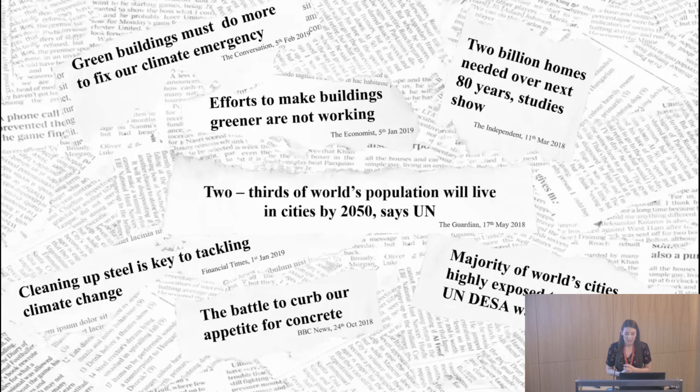The UN has predicted that by 2050, 68% of the world's population are going to live in our cities. And with this comes significant challenges for the global construction industry. We're going to be required to meet the growing demand for urban housing while employing sustainable measures to ensure there is no further advancement of climate change, and to help reduce our progressively increasing risk of urban communities to natural disasters. So what is the solution to some of these challenges?

Well, the solution actually appears quite easy. We just need to build more houses with low embodied carbon using sustainable materials on low-risk sites. But the real issue is what material allows us to do this. And traditional construction materials such as steel, reinforced concrete, brick, aren't necessarily always appropriate for use to solve these problems.

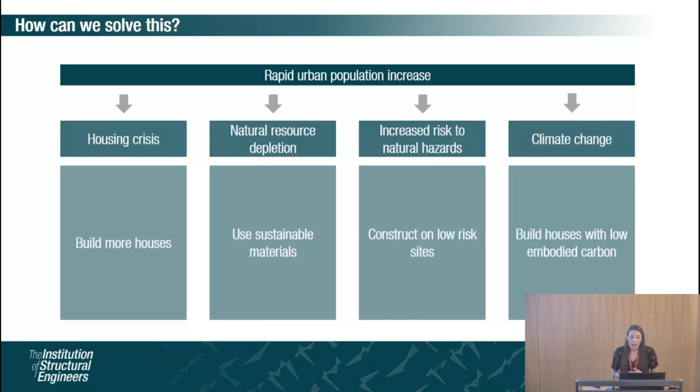For example, traditional construction materials tend to involve labour-intensive construction, which leads to long construction schedules, meaning that it's difficult to build housing quickly and cheaply. The production of these materials involves the use of non-renewable resources, further depleting our natural resources.

To construct on low-risk sites tends to be expensive, and therefore we need a high rate of return to construct economically viable residential buildings. And traditional materials, with their long construction schedules and high labour requirements, tend to be fairly expensive and therefore not always necessarily appropriate for economically viable projects on high-cost sites.

And finally, the production, transportation and construction methods associated with traditional materials, as we know, tends to emit high levels of greenhouse gases, which is further contributing to climate change and resulting in buildings with high embodied carbon.

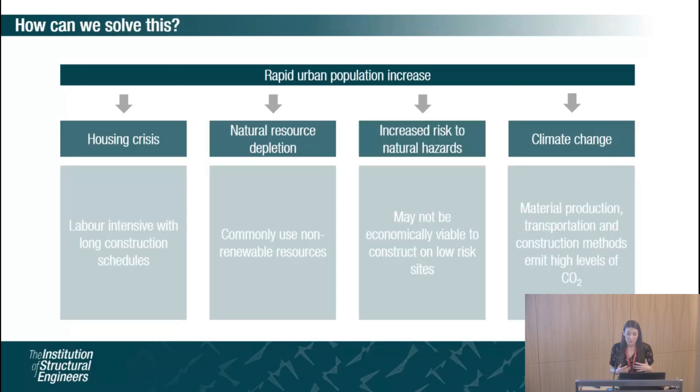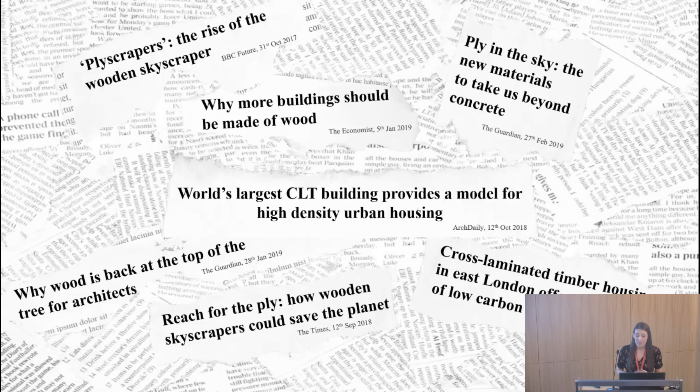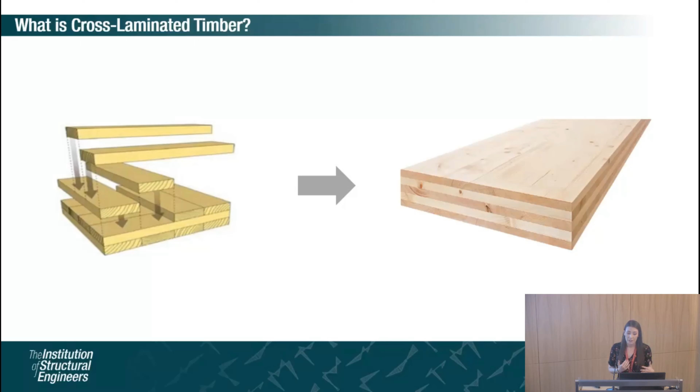As a result of these issues, timber is regaining popularity as a construction material, and the new engineered wood product, Cross-Laminated Timber, or CLT, has emerged as a competitive alternative to traditional construction materials for use in the construction of multi-storey residential buildings. For those of you who aren't familiar with what CLT is, it's formed from layers of timber boards which are bonded to each other orthogonally to create large two-way spanning panels which can then be used to form walls, floors and roofs of buildings.

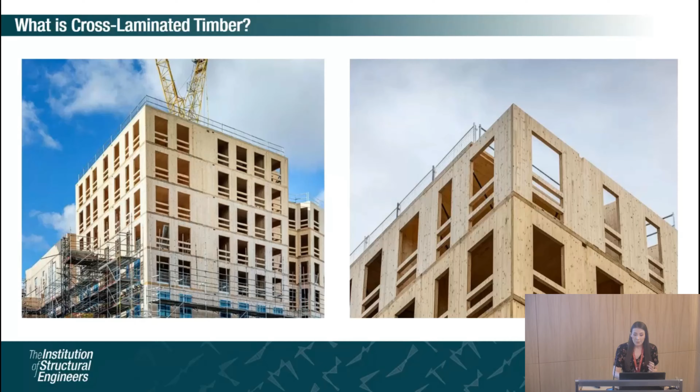So why is it that CLT is going to solve some of these problems? Well, CLT is a prefabricated material. It's brought to site ready to be installed, and this means that it's reducing on-site construction times and labour requirements. If the timber is sourced from sustainably managed forests, it's a sustainable material.

While the cost of CLT is comparable to concrete, it has a higher strength to weight ratio, and this means that on sites where foundation loads are restricted, taller buildings can be constructed using CLT, meaning that there would be a higher rate of return and more likely to be an economically viable project.

And finally, timber sequesters carbon. Not only this, but very low levels of greenhouse gases are emitted during the production of CLT, and it can even lead to carbon neutral or even carbon negative buildings.

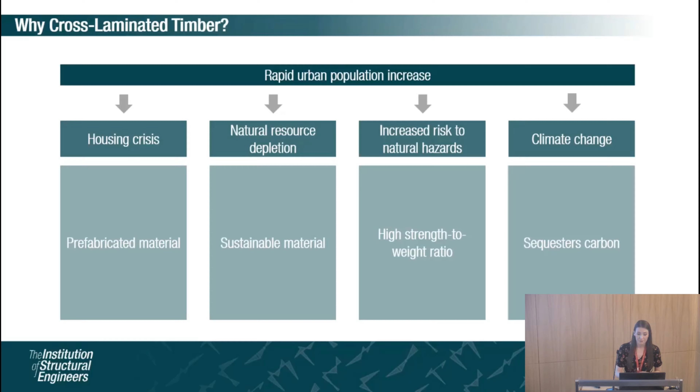CLT buildings as tall as 10 stories have been constructed in areas of low seismicity. However, very few multi-storey CLT buildings have been constructed in areas of moderate to high seismicity, and this is because at present there are still no structural codes for the material, and the understanding of the behaviour of components within multi-storey CLT buildings, such as wall systems and connections, is fairly limited.

So my research aims to add to the experimental basis necessary to inform design guidance for the design and construction of CLT buildings under lateral loading. This is to be undertaken by experimentally investigating the behaviour of CLT wall systems, which are representative of above ground floor story wall systems within a 10-story CLT building under monotonic lateral loading.

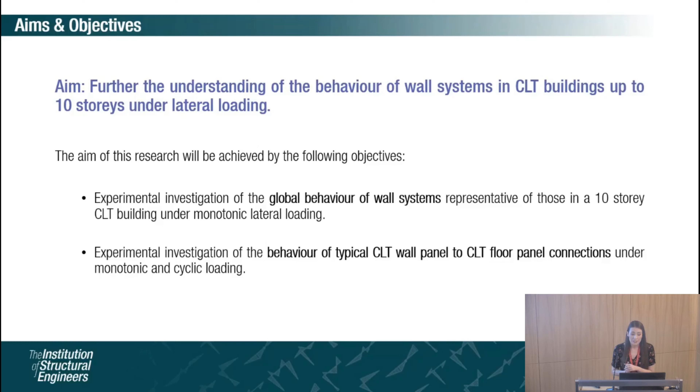As well as experimental investigation of the behaviour of typical above ground floor CLT connections under both monotonic and cyclic loading. So firstly, looking at my connection tests, my test program involved a total of 72 tests where I was testing multiple types of connection using different fastener arrangements under both monotonic and cyclic loading. But today I'm just going to focus on 2 connection types, and these are the 2 connection types which were then used within subsequent wall systems tests.

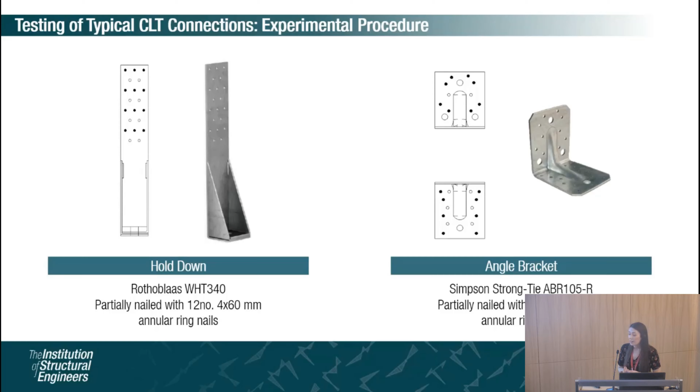In the tension test, the floor panel of the test specimen was restrained while the wall panel was pulled upwards. For the shear test, the test specimen was rotated 90 degrees from the tension test position, and the wall panel was restrained while the floor panel was pulled upwards.

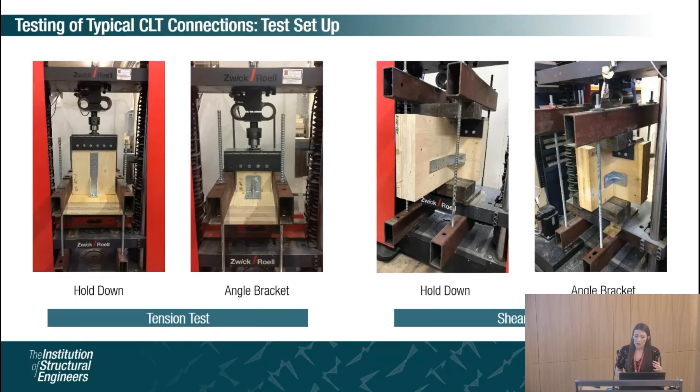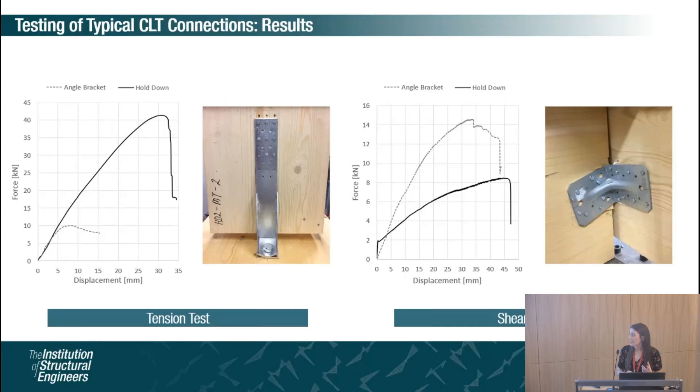Following the connection tests, I undertook a series of 10 tests on a CLT wall system. In the test, a vertical load was applied and maintained throughout each test, and each vertical load was representative of the typical gravity load you would experience at various floors within a 10-story CLT building.

As my work focuses on above ground floor stories, I didn't look at the gravity loads of the ground floor, nor did I look at the top floor, as the vertical load would have been quite low. So the vertical loads are representative of gravity loads at floors 2 to 9 of a 10-story CLT building.

In tests T1 to T8, the wall was loaded laterally to a maximum lateral load of 50 kilonewtons. This was to ensure that the connections behaved elastically, and it allowed me to use one wall system to investigate the relationship between vertical load and global deformation of the wall within the elastic region.

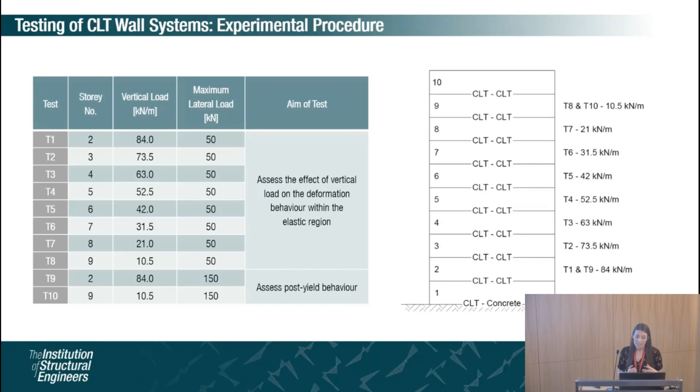Following these two tests, the maximum lateral load of 150 kilonewtons was applied while a constant vertical load was maintained, allowing me to assess post-yield behaviour of the wall.

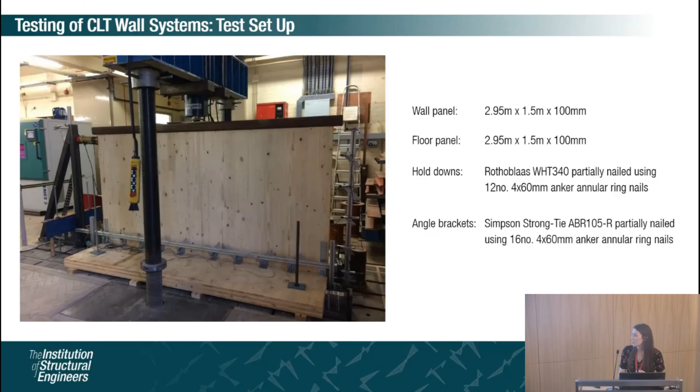The displacements were measured at 19 locations within the wall system, and this was very extensive monitoring, much more extensive than has been undertaken in any previous studies into the behaviour of CLT wall systems under lateral loading.

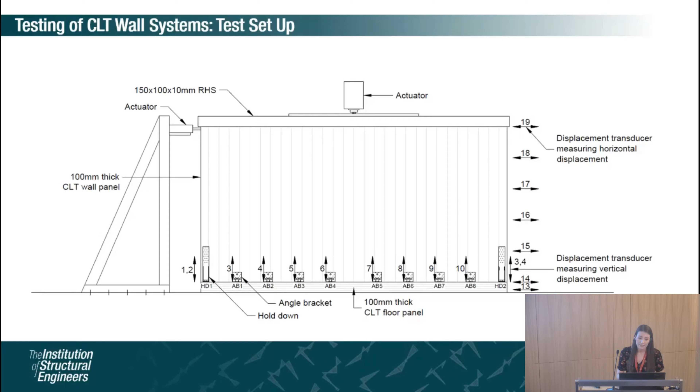As the wall is loaded laterally, it's undergoing a combination of different types of deformation, or different deformation mechanisms. These include in-plane deformation of the wall panel, as well as rocking and sliding of the wall. Therefore, the total lateral displacement at the top of the wall is due to a combination of all these different deformation types.

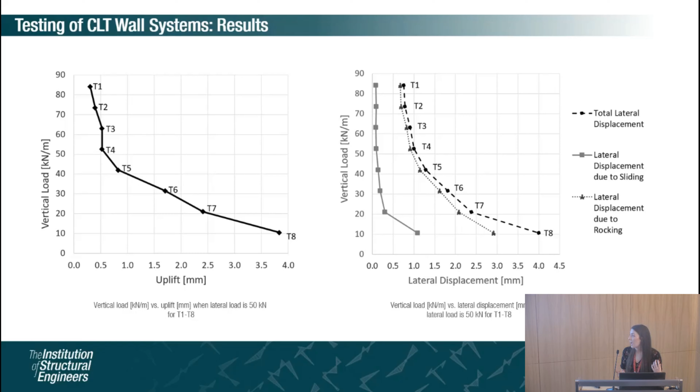This is significant because rocking walls are self-centering once a lateral load is removed. However, if the walls are to slide and the connections are to yield, you can potentially have a residual lateral displacement once your lateral load is removed.

I'm not going to have time to discuss this graph in detail, so I'm just going to focus on the test T8 results in this graph.

From the connection test, I found that the approximate yield load of the angle brackets was 11 kilonewtons. If we were to consider that the shear resistance of this wall system was provided by angle brackets only, it wouldn't have been expected that under any of my tests T1 to T8, in which I applied a lateral load of 50 kilonewtons, that the angle brackets would have yielded, given that the combined shear capacity of the 8 angle brackets exceeded the shear force.

However, I found after test 8 that I had a residual lateral displacement. One of the possible causes of this residual lateral displacement is that the shear capacity within my wall system was actually lower than the shear capacity found within the connection test, in which I tested the bracket under shear loading only.

That's because within the wall system, as I found in the connection test, the angle bracket also has tensile resistance, and so it's likely in the wall system contributing to that overturning resistance and therefore subject to tensile load as well, under bidirectional loading. This bidirectional loading may lead to a reduced shear capacity of the angle bracket.

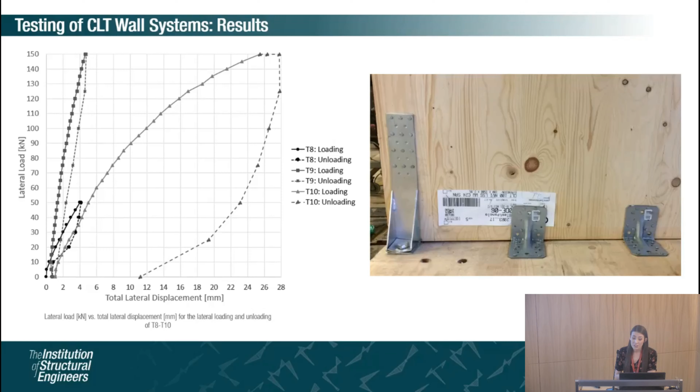So in conclusion, there was varying global behaviour noted under different vertical loads. Each deformation mechanism was contributing to a different extent, and this would suggest that you could expect variable behaviour throughout a multi-storey CLT building, confirming the need to consider connection design at each individual storey.

Both the connections have shear and tensile strength, and therefore are both likely to be contributing to both sliding and overturning resistance of the wall system. As the angle bracket may also be resisting overturning, it's subject to bidirectional loading, which is potentially leading to reduced shear capacity.

This is significant at low vertical loads, when sliding becomes significant, given that sliding is undesirable and should be limited. Therefore the shear capacity really needs to be understood to make sure that it is sufficient for the building. However, further work is needed to quantify to what extent there is a reduction in shear capacity of the angle brackets.

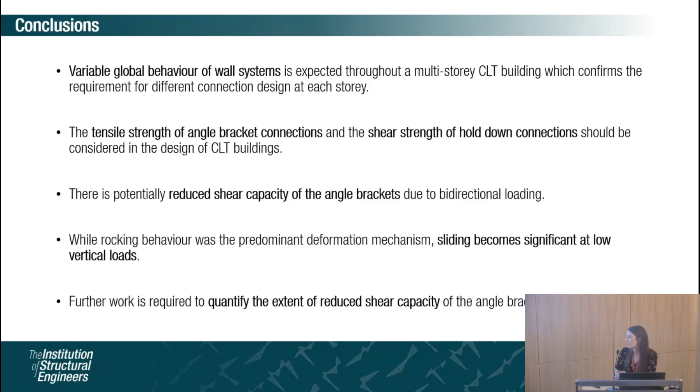Finally, just to reiterate why CLT is such a promising sustainable material, here is an image of a recently constructed CLT building called Blackdale Student Residence, at the University of East Anglia.

KLH, who were the CLT supplier and subcontractor for this project, stated that this project required the use of 1,970 trees, which they have estimated is equal to the number of trees required to produce the newspapers, magazines, and free literature available every 2 days on London transport.

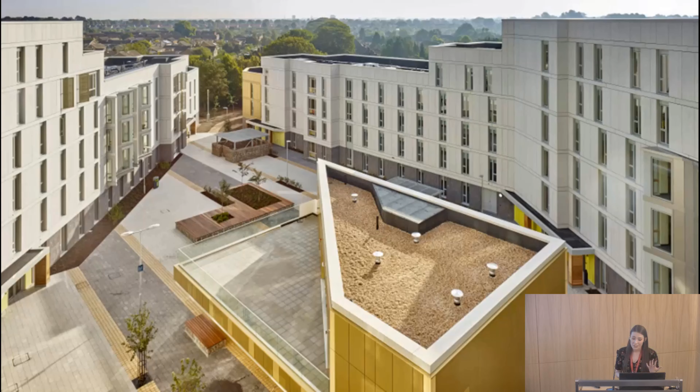And yet this building is capable of housing 514 students and sequestering 935 tonnes of carbon.